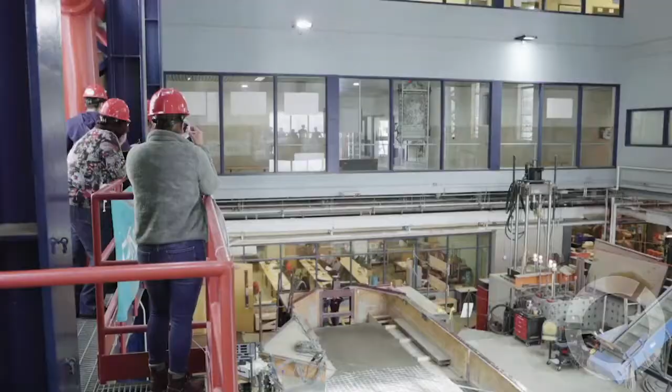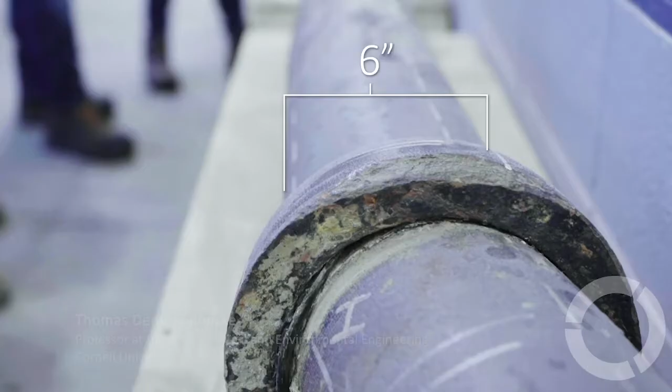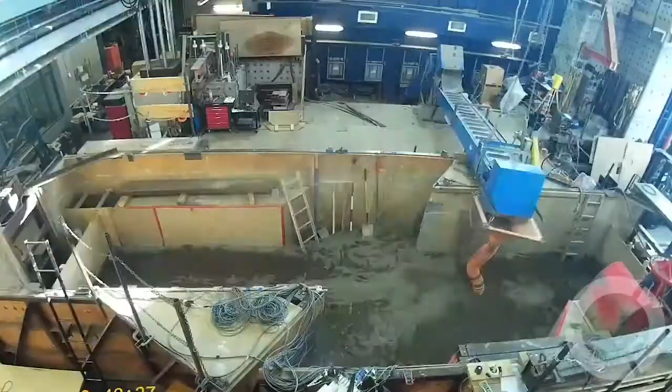We actually performed a fault rupture test on a 6-inch diameter iron pipeline, and it's lined with SANEXEN Aquapipe Generation 2. So we have something like 138 or some odd instruments attached to the pipe. We then filled it with soil, and we ran a fault rupture test.

So, for example, if we test a pipeline system, we typically will test a very convenient and universal sized pipe, something on the order of 150 millimeters, something of that sort. And we'll run a series of tests on it. We also, and I think this is unique to our lab, are able to characterize the performance of a whole variety of different underground facilities. And we're also able to analyze those.

We have various modelers who can model the performance of these systems so that when we do large-scale tests, we actually can convert what we know from large-scale into numerics, so we don't have to repeat the test. We can actually take the data that we've generated and come up with models that people can do engineering and analysis for. In addition, we also model large systems.

For example, we were among the first, in fact, I think we were the first to develop what we call a hydraulic network model for water supply. That was in San Francisco. We actually worked with a couple of firms and the fire department in San Francisco, and were able to model what they call the auxiliary water supply system. And they made some policy decisions and some planning decisions based on what we did.

And based on what we did, the fire department was able, with our assistance, to put the fire out in the marina in the 1989 Loma Prieta earthquake. Since that time, we've actually modeled the entire 10,000 kilometers of different pipelines and couplings and connections and different types of tanks and reservoirs for the Los Angeles Department of Water and Power. And they've made some policy decisions based on the large models that we've created for them too.

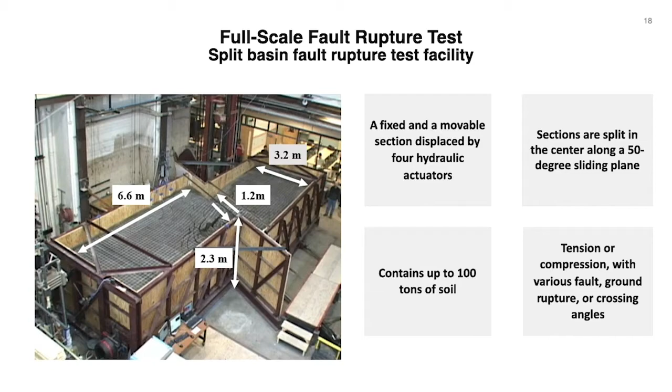And we've been particularly excited about the work that we've done with SANEXEN, with the liner products and so forth. They've been extremely good clients and very, very helpful and useful to work with. We've learned a lot, and hopefully SANEXEN has at the same time.

No, we surely did. Tom, before we get to our main topic, I understand that Brooklyn Union Gas work eventually led to probably pioneering work on cured in place lining methods for gas, which was probably the first work done on somewhat resilient assessment work in the world, I believe.

Yeah, the gas industry became quite interested around 1998, 2000 in rehabilitating pipelines in situ. And we ended up testing some linings, a Starline 2000 lining. It's a cured-in-place pipe liner, not a cured-in-place pipe like SANEXEN's product is. And we were able to characterize and do testing on that specific lining so that they could line cast iron mains parallel to excavations for sewers and water lines and so forth.

And even though those would generate differential settlement, they wouldn't generate a lot of lateral movement, but they would generate differential settlement or differential movement, rotation between the joints. Not a lot of axial extension or contraction, but some differential rotation and settlements. Those materials we were able to validate and manage to get them into practice for people.

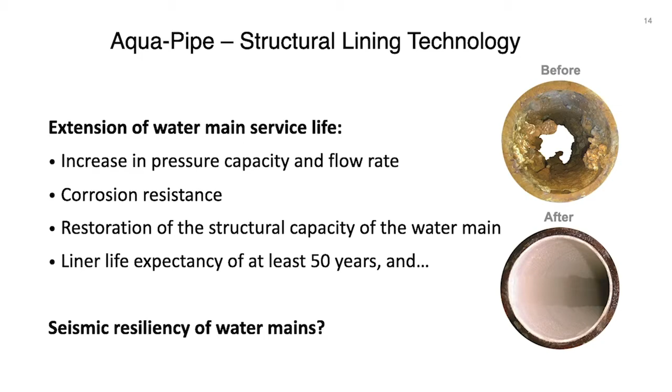No, a freeze-thaw cycle that we get in our cities, Montreal, Winnipeg, Toronto, has those all the time, actually more than other places prone to seismic events, although those movements are less important, but still quite significant. And our product has that ability to withstand very significantly that deformation, that strain that's imposed by the surroundings of the pipe. Most, if not all, of the other products that are used for lining water mains do not have that large-scale deformation capacity. So we had that data, but it was highly empirical, non-controlled, yet third-party and independent. We needed to go the extra mile and get something that's recognized.

And as time went on, we were talking in particular with Los Angeles Water and Power Department. And they told us, well, you claim that, you need to assess it with Professor O'Rourke. And their seismic or earthquake resilience expert over there, Craig Davis, and Tom were instrumental in getting us that old program that we launched at Cornell.

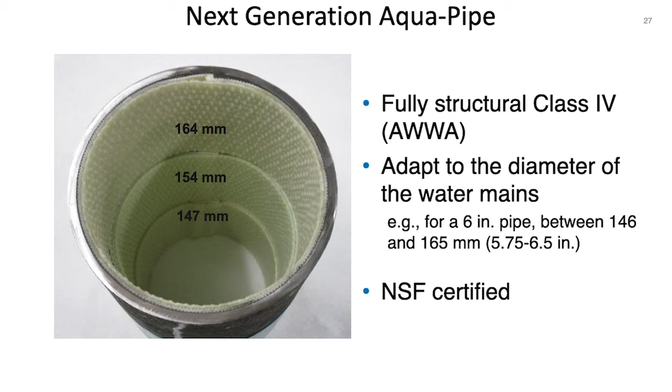So we're talking about basically testing the adaptive capacity of a pipe. Exactly. So we had that old set of data that's about 5 to 7 years old at least. So we decided to take our technology and improve it even more, and get to our next generation of Aquapipe, where we have a product that's able to adapt to the internal diameter of a pipe, conforming perfectly to it, while maintaining the resiliency and even improving it. And we went to Tom to make that demonstration. And perhaps, Tom, you could complete on how this was tested at your facility.

Yeah, I'd like to maybe expand on one point you made, Martin, and that was that large movements occur not only during earthquakes. You may get them from freeze-thaw cycles. Of course, Canada is subject to freeze-thaw, all utilities in Canada. And similarly, in New York State, there's a lot of freeze-thaw activity that goes on. But we actually call our expertise an expertise in hazard resilience. So not only are we going to advise and do testing to reinforce products to be earthquake resistant, but we're gonna do it to make them hazard resistant.

So some natural hazards that cause differential movements are hurricanes. Large flooding events cause regional subsidence and actually have washouts, undermined pipelines, cause movements that something like a lining system can resist, and therefore they can perform after the hurricane and not have to be replaced as quickly or replaced at all. So that's one part of hazard resilience.

Other parts of hazard resilience might involve mining subsidence, might involve construction from tunneling or adjacent excavations, which often cause ground deformations, and might actually involve growth faults, regional subsidence from withdrawal of water. For example, in Arizona, they actually have normal faults that develop at various locations in the groundwater basin there and cause concentrated deformation, because as they withdraw the water, they're causing regional subsidence, and that regional subsidence manifests itself in terms of local differential ground movement that affects whatever is buried in those particular locations. So there's really quite a lot of sources of permanent ground deformation.

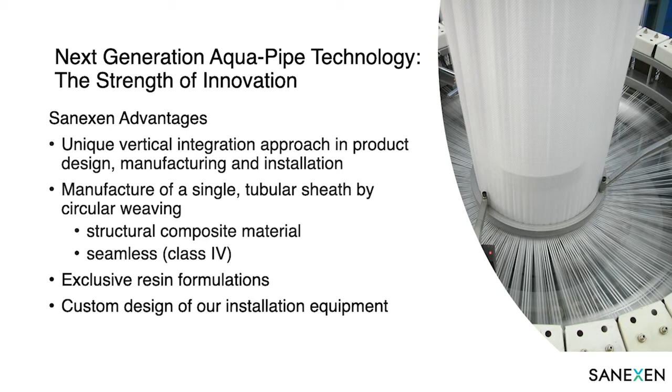And we combine all of this work with respect to ancillary deformations, and we numerically use that information in a model of a big fault rupture that we do before we do the actual fault rupture test. The fault rupture test is quite complex, and therefore we have to give it a full numerical analysis ahead of time using the results that we've gathered from the other tests. And we did that. And we get an idea for how much deformation can be sustained. And then we run our test and we see how much deformation is actually sustained. So there are things we can do in terms of prediction, but there's things that we can't do in terms of prediction. Only a large-scale test can do those.

Once we have the information, the data from the large-scale tests, we can refine the numerical models in the way that they need to be refined and therefore can substitute numerics for actual testing in the future. So, by the way, before we ran the large fault rupture test, I remember you had some internal predictions on how far we would go, which you never really shared. You gave us an idea, but there was a cutoff point that you thought we may not have crossed, let's say. Can you tell us a little bit about that? What did you expect, and how did those predictions pan out?

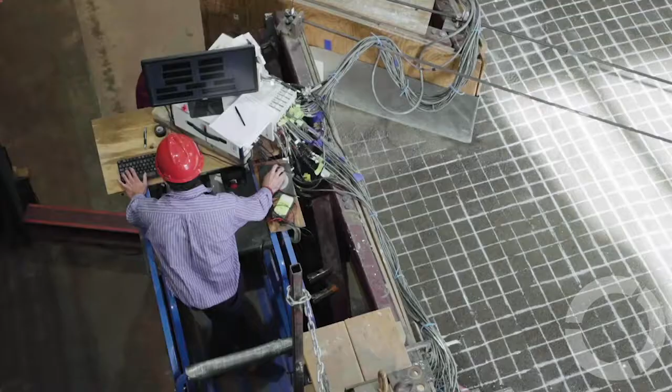Well, according to our analysis, it should go all the way, except we have no idea how much rotation and axial pull the liner is going to take. Right. Eventually, it's got to go. Eventually, it has to. Okay, you've now surpassed IPEX. Pretty exciting. This is the largest displacement that we've imposed during our testing. You now are exceeding everybody.

We thought that maybe the lining system with the existing pipeline could tolerate on the order of about 2 feet, 0.6 meters of displacement, a fault movement. We typically run fault movements anywhere from 0.3 meters to 1.2 meters. We typically have a limit at 1.2. We could actually test to about 1.5 or so, but the way the box was configured, we'd have to move everything around. So typically, if we can get it to go through 1.2 meters of fault displacement, then we can model the large scale movement behavior with respect to the pipeline.

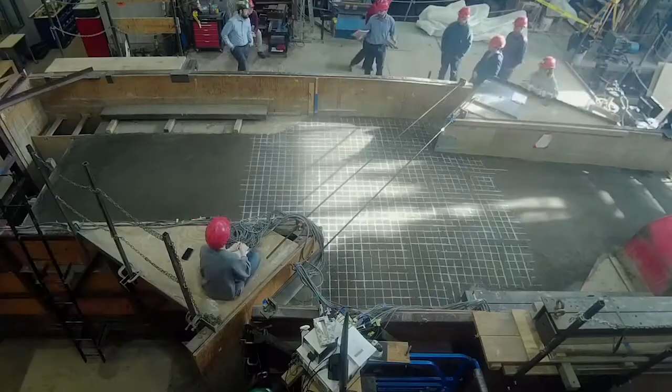I'm sorry, Tom, to cut you off, but I don't want this to get too technical, but that cutoff line of 0.6 meters really depended on the adhesion level and the ability of the interface between the liner and the pipeline to propagate. Yeah, it really depends upon how much you can transfer stretchability to the lining system without causing forces that cause a rupture of the lining system. So basically, the lining system for SANEXEN, and I suspect you'll talk about this, Martin, but we used what's called an Aqua-Pipe Generation 2 lining. That lining was able to detach itself from the pipeline, still maintain pressure and flow.

One of the things we do in our tests is we run them at the water pressures that are actually operated when the systems are actually in performance. So we're one of the few labs that actually can do these tests and do the measurements with the precision and acuity that we're able to achieve, and do these measurements while the pipeline's under pressure. Mm-hmm. So we actually exceeded our 0.6 meter. We took the SANEXEN system out to the 1.2 meter limit. We couldn't push it any further than that, because of the limitation of the setup.

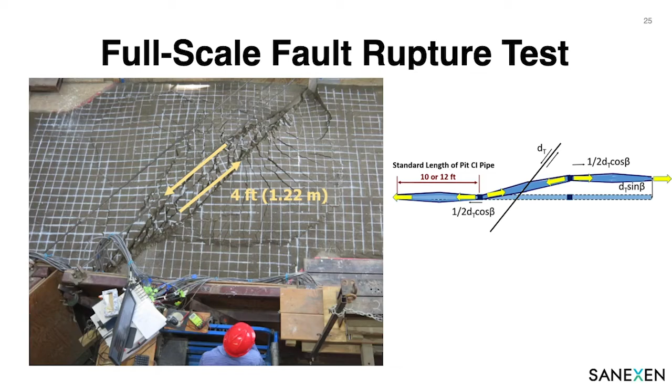That's right. And we were able to determine that the lining itself, on average, had stretched about 6.3 to about 6.5%. It's a fairly large percentage. And it hadn't shown signs of achieving failure force, where the forces that we measured were a maximum of about 30 kips, 30,000 pounds. And our estimation of the lining capacity was set at about 62,000 pounds. So we were well under the force requirements. And apparently we were under the deformation requirements.

We had measurements that showed us exactly what the joints were doing, because the pipe pulls apart at the joints. As it pulls apart at the joints, the lining emerges. If you imagine, a pipeline actually gets larger in its longitudinal direction, and as it stretches or gets larger, it can't stretch on the iron. It has to stretch at the joints. And the joints literally pull apart.

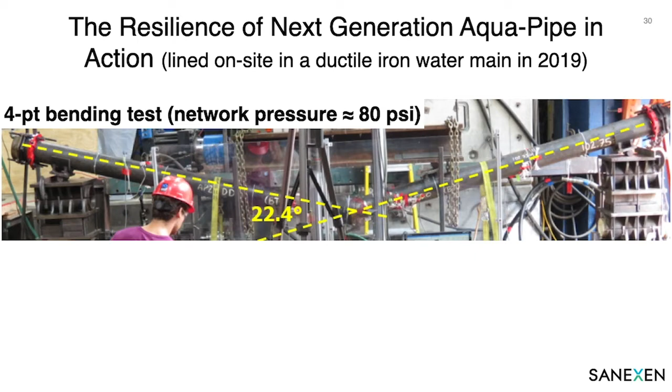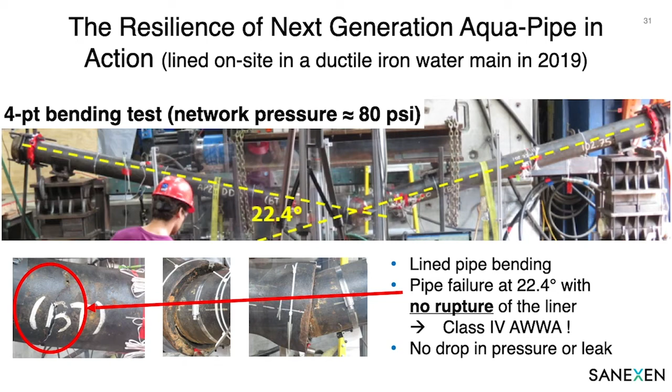And the lining emerges from the joints, and the lining has to take that stretchability, the force and the deformation capacity, and it has to rotate at the same time, because we actually do tests that cause the pipeline to extend and rotate. So it had to take both of these deformations, and it did it, and we measured it precisely. So not only do we measure it with our instruments that are getting measurements that pertain to the performance of the pipeline while it's being deformed, but after the test is over, we leave the deformation in the soil box and exhume or expose the pipeline.

And then we have a special laser system, a Leica system, that actually runs lasers and measures the relative displacement of the pipeline. We take a measurement before we even bury it. And then we take a measurement afterwards, because we excavate it very slowly. And therefore we can determine after the fact what the final deformation was. That should obviously conform to what our measurements are telling us for the final deformation.

The measurements do much more. They actually give us the full development of the deformation, but they should at least conform to what we're able to measure in the Leica system. And they did. They did quite well. There was very, very good compliance between all different measurement systems.

Have you seen that kind of performance in other products on the market? I mean, we typically don't expect that a pipeline system will sustain the full 1.2 meters of movement. And to perform well, they don't have to. But this particular product performed very well, and it did sustain that deformation. It could have sustained more.

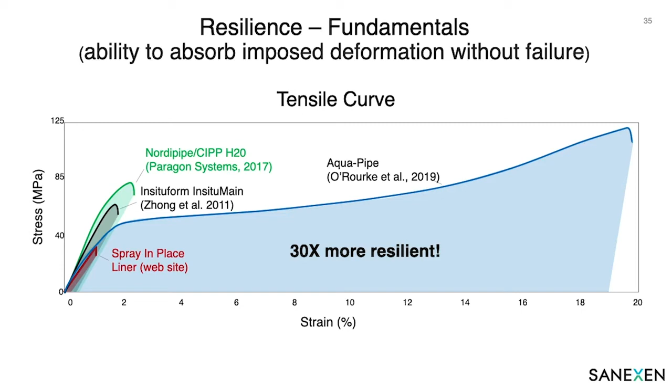You're referring with previous testing to brand new water mains and not lining materials, are you? There are a number of systems that have been created to be able to move at the joints and therefore go through some of this deformation that I just talked about. And we tested some of those systems.

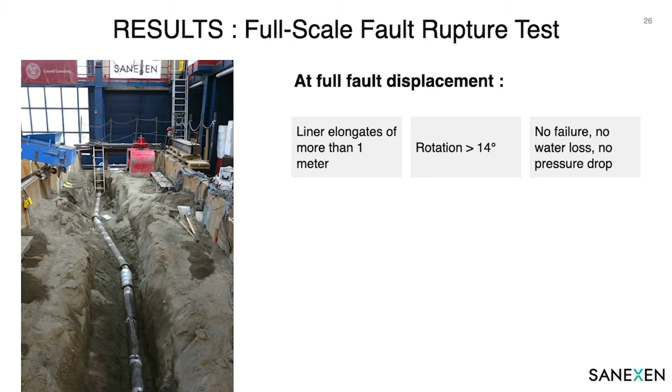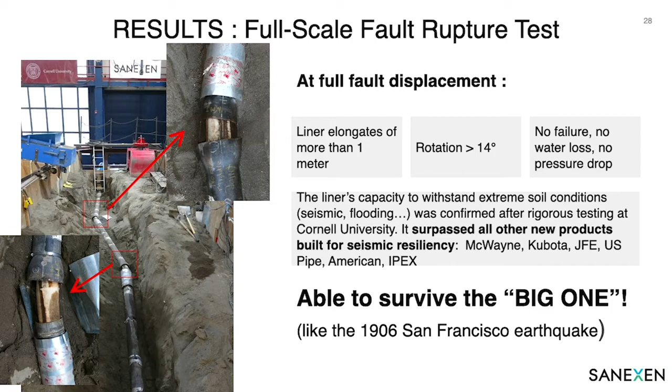Before we go back to our original topic, Jason, a scoop for you, Tom. Last week we finally received the testing on the coupons from the joint that were pulled out during the fault rupture test. And the results are clear. There's no significant difference from a statistical standpoint with respect to design specification of the product. So it looks like it's unaffected. I'm amazed. Yeah, no, it's really like brand new.

What we did in these tests, again, SANEXEN is committed to high performance and quality. When the test was over, we actually cut up the pipeline and took out samples of the lining and samples of the pipe and sent it to SANEXEN. They wanted to perform their own tests to substantiate and back up some of ours.

We also had our testing people go into those pipelines and measure the pipe wall thickness and the liner thickness at several different locations, so that we could confirm the dimensions associated with the lining at several different locations along the pipe, and the dimensions of the pipe, and those have been confirmed. So not only was there follow-up testing, but there was follow-up measurements.

And one of the measurements performed during the test is on the lining that gets extruded at the ends of the box. This is the same lining that's been put in the pipeline. We take a portion of this extruded lining and it goes to SANEXEN for testing, and it goes to Cornell for testing. Those tests confirm the behavior from other tests that we have of the lining. And it's actually the results of those tests, on the same lining that was tested, that we put inside our models to interpret and understand the test results.

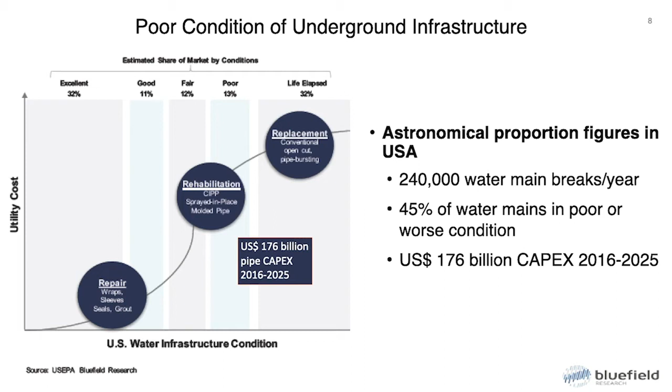Late 90s, the city of Montreal comes to SANEXEN: we have a huge problem with our leaking water main infrastructure. It's flooding our sewer system, and it costs us a fortune to both get potable water distributed and then treat that water that's flooding the sewer system downstream at the wastewater treatment plant. So we, being a technology developer, a technology provider with intimate know-how and knowledge of the environmental issues that we need to address, developed this Aquapipe product.

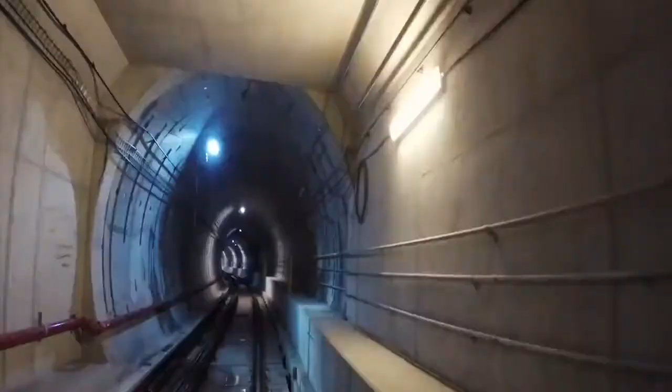Nowadays, we're being asked by cities and water utilities. The first question was from Toronto, in their subway extension construction projects. They had a 12-inch water main, and they have a new tunnel that goes underneath. And they say, we can't dig.

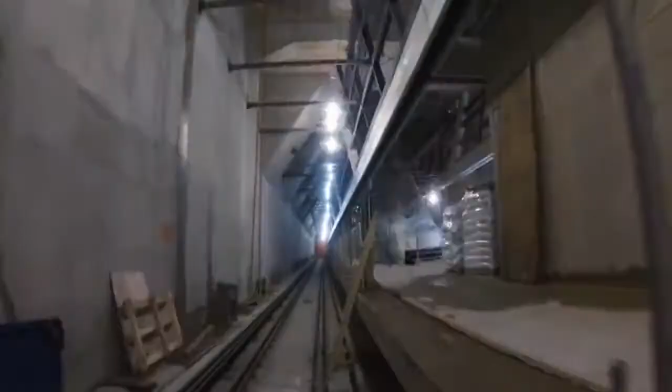I mean, there's buildings, we're slightly outside downtown, but in a dense area. What can we do to prevent that pipe to subside? Well, put Aquapipe in. And so we did some testing, and that led to demonstrating that this was able to withstand all those outside constraints or conditions.

Now, going to the United States, and especially on the West Coast, they heard about the resiliency of our product, but they want us to do more than showing good results on a small testing bench. And so we started a big program in the last 5 years to make our Aquapipe product even stronger and come up with the demonstration that they needed for them to use that product to introduce into their pipeline rebuilding programs.

LA has a big one, San Francisco, East Bay MUD, and a number of cities along the West Coast, San Diego, Los Angeles, Las Vegas in particular. And that's how we got to develop that. All large cities, basically, that are quite prone to earthquakes, if I understand correctly. Obviously the larger utilities have larger budgets and larger liability as well to address, and their asset management program is generally far more developed. All those smaller cities have their own.

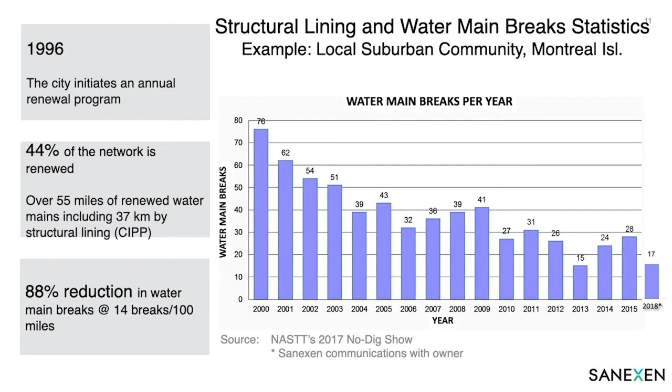A suburb city close to Montreal that's called Dollard-des-Ormeaux has had, I must say, in the past, huge issues with its water main network and the water main breaks. And they did pioneering work with us to use cured in place pipe and Aquapipe to address those issues. As a matter of fact, they've lined more than 40% of their network today. There's no city on earth that has done anything close to that.

Obviously, it's smaller. So in terms of absolute number, it's probably 60 kilometers. It's not 5,000 like in Los Angeles. But still, the statistics are very clear. They reduced their water main breaks by 88% doing so. Oh, wow. By rehabilitating, most of it is Aquapipe, not all, but like 90+%. And so we're pretty proud of them recognizing our technology and investing in rehabilitation techniques.

Were some of these larger cities that are in dire need of this type of technology able to see the results of your tests, Professor? So major cities like Seattle, like Portland, Oregon, like Vancouver, like San Francisco, like Los Angeles, like San Diego, etc., these are big cities that have earthquake performance issues, and the lining systems developed by SANEXEN can solve many of these. We also have other cities like New York that don't have such a big earthquake hazard, but as we learned, have a very big hurricane hazard, have a very big construction-related hazard.

So these lining systems are hazard resilient insertions, right? So they not only provide resilience against earthquakes, but they provide resilience against hurricanes. They provide resilience against ground movements associated with urban construction, frost heave, et cetera. So large cities don't have to be in an earthquake vulnerable zone. Many of them are to some degree, but other large cities may be less subject to earthquakes, but more subject to hurricanes and construction related features. These kinds of systems that we're looking at provide solutions to those problems also.

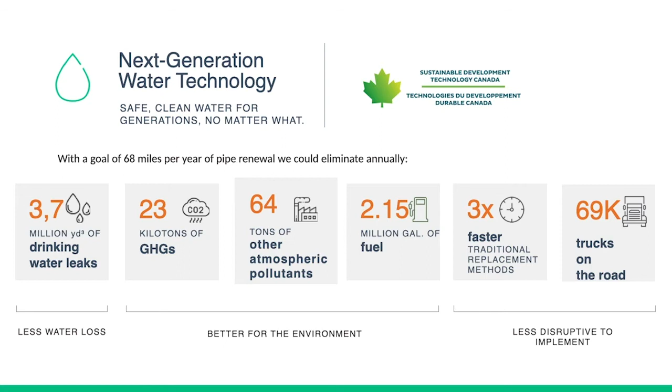And obviously, when you use Aquapipe, you use it downtown. A heavily dense, populated area, when you don't have the luxury of opening up the street, you see what I mean? So that's 69,000 trucks that are not in our downtown area. That again, with those 68 miles that we would do in LA, that's a huge impact. It's a very tangible social, environmental, and economic impact using our technology.

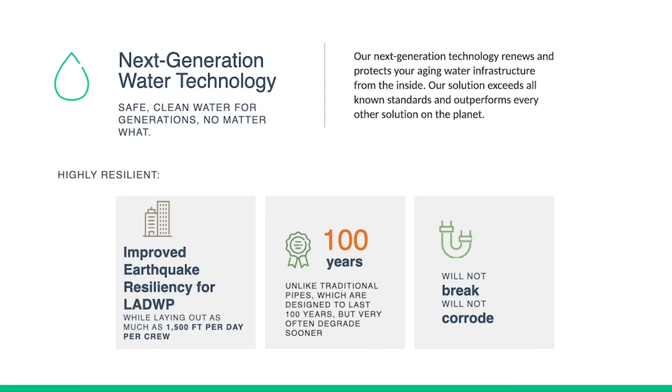And again, referring to LADWP, we would contribute to reducing the number of breaks per 100 miles that they have. Currently, they have around 17 breaks per 100 miles. And looking at the numbers we've had with the thousands of miles that we've lined so far, every line that we would install would be resilient for years and years. We warranty for 50 years. We're working on a demonstration that it would be for 100. So every section would not break anymore. So that statistic of 17 breaks per 100 miles would reduce significantly.

If I use the example we saw during the talk today, that suburban city of Montreal reduced by 88% their number of breaks per year, per mile, by using our technology. So the impact would be very, very real. And just to finish, we do that, adding that seismic resiliency to whatever we line, at a rate of, let's say, 500 to 1,000 feet per half a day per crew. So we could do, let's say, 1,500 to 2,000 feet per day per crew of that goodness, if you like,

of that good work. And other technologies, open cut technologies that are seismic resilient, you can install less than 200 feet a day per crew. So we're doing 10 times more than they're doing. And with all those environmental benefits, with all those social benefits, and of course, with all that taxpayers' money saved. So there's a lot of benefit in using our technology, long-term, short-term. I'm starting to understand why you call it a game changer. It's definitely a game changer.

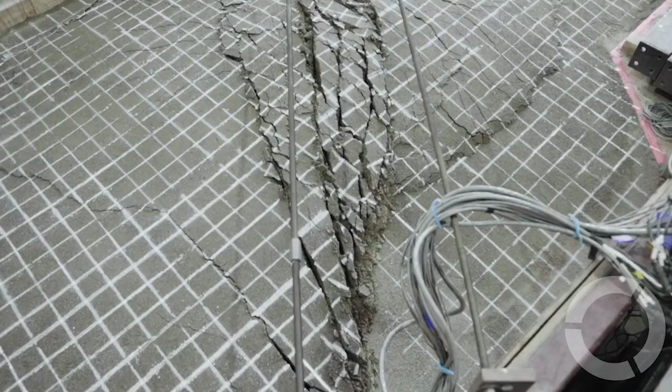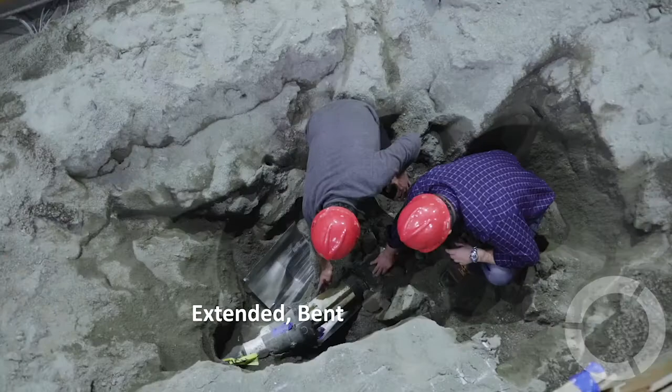The SANEXEN lining, the AP2, has not failed. So it gets both extended axially and it gets bent out of plane. So the joints where the lining becomes exposed to the soil actually rotated and extended. It's as good a test result as one could imagine.

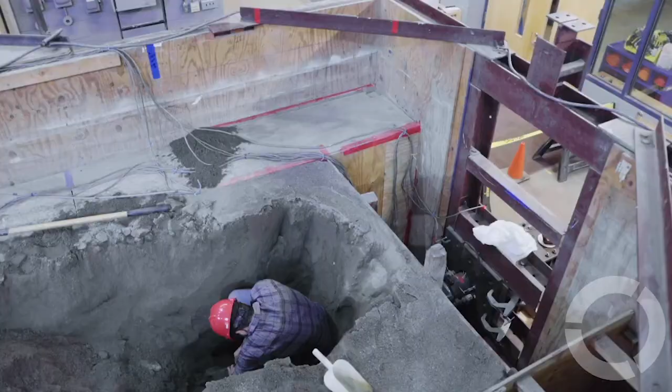So this is the only solution to replacement. So instead of opening up streets and affecting traffic for months, we access the pipe from the ends and then we repair and renew the pipeline from the interior without affecting the street.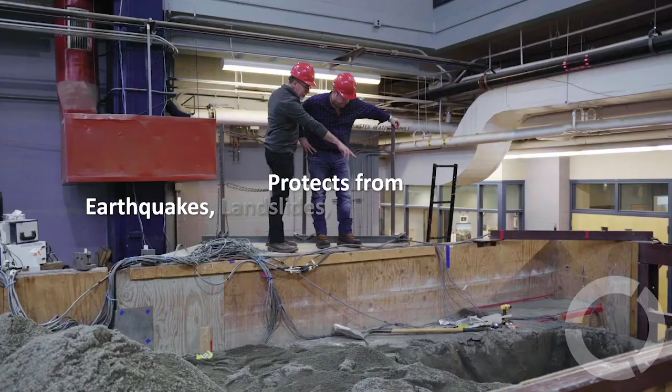Into a product? Yes. We see our product as a solution for safe and clean water for generations, no matter what. You put it in the ground and that's the last piece of repair or renewal for that section you'll ever do. That's our vision. That's what we want to do. And we've achieved it. When it's only the water main you need to fix and make reliable again, well, there is a solution.

Yeah, it's just thinking of COVID here in this situation, I realize how important the lack of disruption to the community is. It's really remarkable work. I didn't realize it based on my research before speaking to the both of you, but clearly the advantages are vast. And clearly this is the right choice for any city, for any community, especially the larger ones, obviously.

We certainly believe so. And now the real job starts. We need to install that into cities and bring that great solution to all our customers.